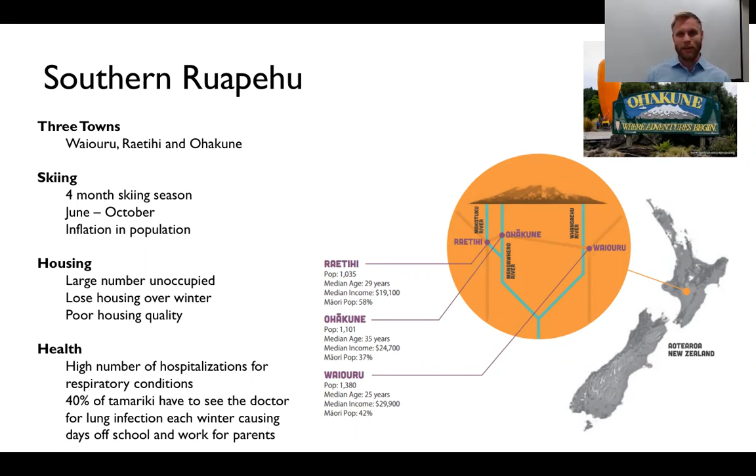So for those who don't know, it's known as a tourist town, particularly for skiing. 4 months of the year, the population explodes as people rush in and rent holiday homes to go skiing. And of course, this leads to a number of problems. And while we're on this slide, just have a look. Median income in Raetihi, Ohakune, Waiouru. So Ohakune, 24,000 a year. Raetihi, 19,000 a year median income. So things aren't going terribly well.

And of course, there's some wicked problems. The 30 to 40% underemployment. People get employment where they can, obviously seasonally. When the ski season kicks up, they'll rush in and get as much work as they can. And also harvesting the carrots, they'll do work there. But a lot of the time, there's nothing. So there's a lot of people really eager for meaningful work.

Because it's a tourist economy, there's homes everywhere, but most of them are actually unoccupied most of the year. They're holiday homes. People rush in to rent them during the ski season. Off season, they sit unoccupied. And actually, a lot of the locals, in their contract, they'll lose accommodation over that period because the landlords can make more money renting at some ridiculous rate, $100, $200 a day for tourists.

One of the big ones is the peak power demand that comes in. So when everybody flocks for the ski season, it causes a huge increase in peak power, and it's way over capacity for what this area can support. The lines company gets slapped with fines for this, and that actually gets passed on largely to the locals because they're the ones paying the costs that normalize throughout the year. So they have incredibly high power rates. It's really surprising to see, actually. You see some of their statements and you think, how are they paying more than me for less?

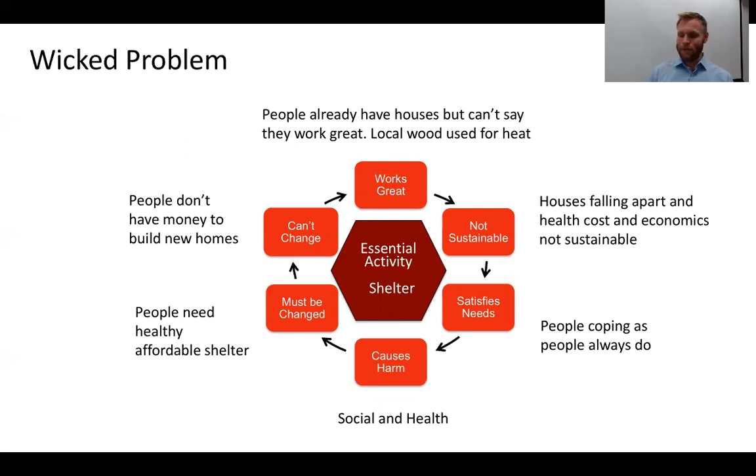Now, why are these wicked problems? Because what's happening at the moment does work. Barely, but it works. And so because it works, it's just kind of ticking along, but nothing's getting better. So it's a big pitch, which I'm going to lay out for you over the next few slides. We went there and we saw a potential for a transition engineering shift project. That is sustainable log homes for the region, using local resources, local labor, feeding into the local economy as much as possible.

And not just any log home, but we want it to work as much as possible with the local people to see what would a Ruapehu, what would a New Zealand log home look like? And I think we found it. So why log homes? Most of you may not be familiar with them, but they're incredibly healthy. They've got good insulation values, and those thick walls have a lot of thermal mass.

If you ever get the chance to go into one of these homes, when you walk in, there's a feeling. What I know as an engineer is the radiative heat transfer. It has a certain feeling, just like if you walk into a cave. It's that huge thermal mass in the walls, but you're walking into a warm cave and you feel secure in them because they're these strong, hefty, thick-walled buildings. It's quite a feeling.

They are affordable, despite maybe popular opinion. Most of the time when you see log homes, you will see log mansions, people specifically seeking out to make this very impressive house. But just the general costs are actually quite low. They're very labor intensive. So when you are spending money on a log home, you're spending money on the craftsmanship, the thinking, the smart use of resources that go into it. You're not spending it on stuff.

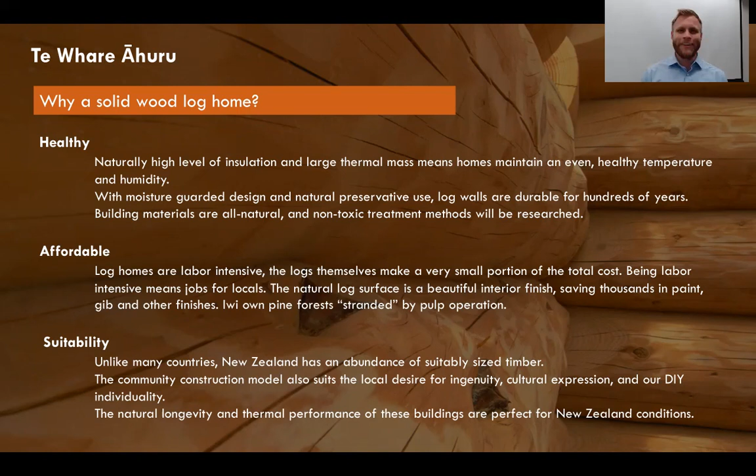Log homes use less fasteners. They won't use cladding, the cladding of the logs, the internal gib. Instead, you have logs. So they use a whole lot less stuff. And the stuff that is used is all from the local economy. It's all from the local area. And unlike many countries, New Zealand, we have a wealth of timber. We have it everywhere. So we're well suited.

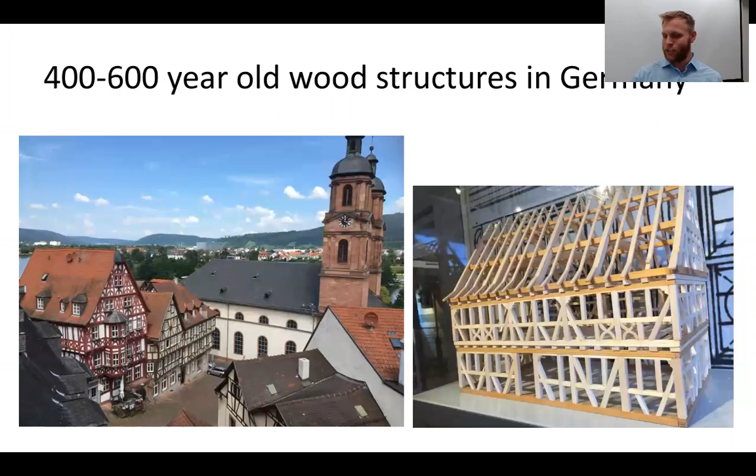So as I said before, we wanted to find what would be a unique, identifiable log home for this area. So we came up with Te Whare Ahuru design, and that was with working with the Ngati Rangi, talking, understanding what they want in a house, not what's been given to them, but what would they seek out. And we found out there's some things that are really important. Some things were kind of surprising.

So a side entrance, and before you enter the house, a place to wash your hands, a place to do wet work. That was really important. And also a generous and deep porch. Right, so these stood out as really important things. And one of the characteristic pieces, which is kind of really beautiful about this project, is they identified a particular roof pitch. And it's the roof pitch that actually mirrors Mount Ruapehu.

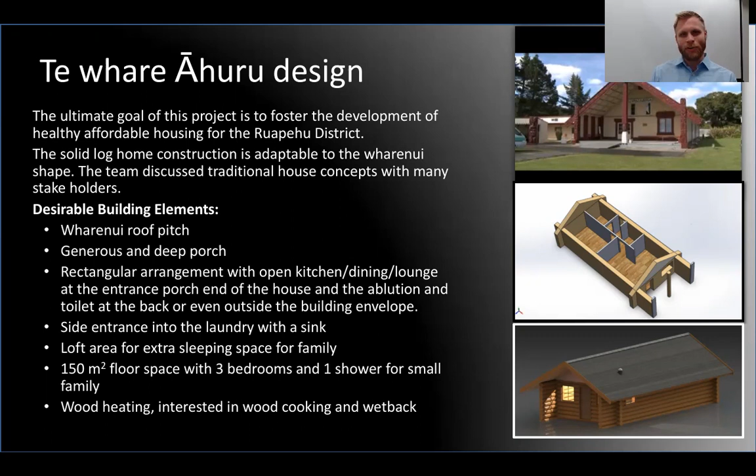And when you see images of this log home or plans of this log home, you think, no, that's nowhere else. That's just here. That's really uniquely New Zealand. So I think we succeeded in actually, it's a home that you could look at and you could think, that's us.

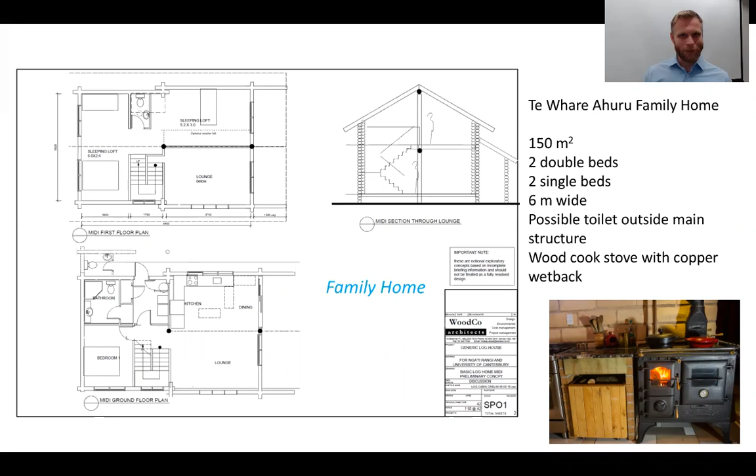So we had architectural plans done for these. We worked with people who know about log home building. There's not a lot of them. So Jess Patterson worked on these. We did plans for a large family home. So 4-bedroom, 150 square meters, 2-story. It's easy to go 2-story in a log home. But also a granny flat.

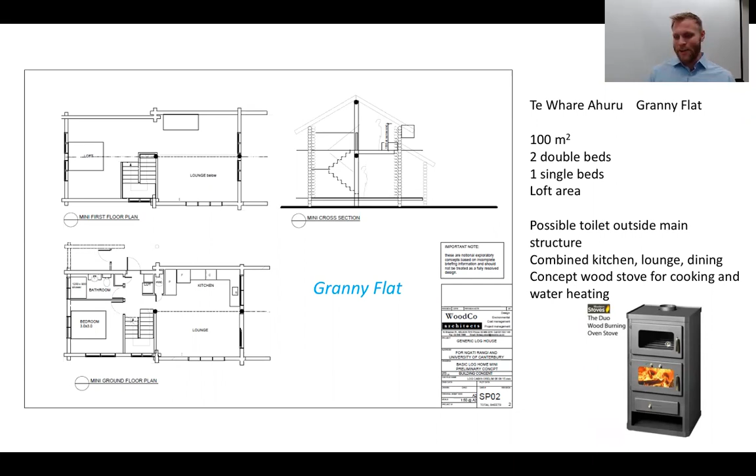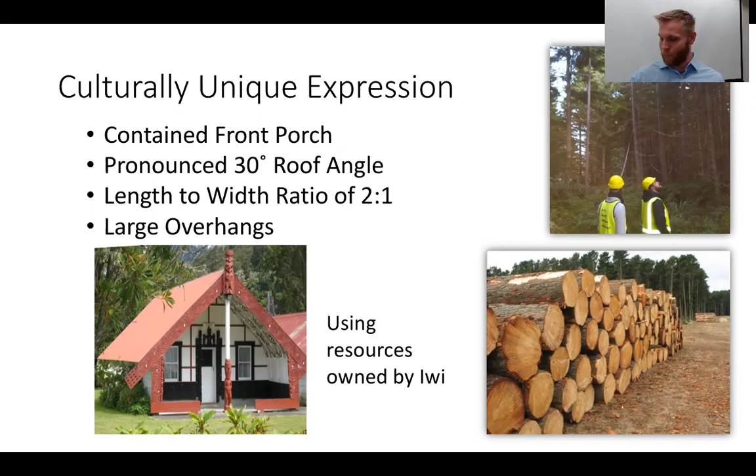And that was once again by consultation, understanding what people wanted these homes for. Flexible, adaptable. So big spaces that you could use in many ways that could accommodate a lot of people when you need it, and not many at other times. And of course, all of them are heated with a wood burner. So once again, there was that characteristic roof angle and really beautiful front porch. Large overhangs. The overhangs become important. We talk a bit more about them later.

And it was important for us to not just look at this as an abstract, there you go, here's a sustainable house, but something that made sense in the area for the people. So we did a bit of commercial research around this as an industry for the area. We know people who are very invested and interested in the land. They do a lot of work with it, who know what's around. There's forestry around Ruapehu as well. We visited the forestry there.

So a business that builds these houses for the local area, but also for the rest of New Zealand, where you can build the skill set and the craftsmanship required to build these handcrafted homes. And I had experience of building one of them. So there's a lot that goes into it. You've got to think, and you're not working with a linear Cartesian material. You're working with a tree, and every tree is different. And you can't use every tree too. I won't get into that. So a local business working with the local people and building local jobs.

And of course, being engineers, we had to do some engineering. We wanted this to be passive. And one of the ways is how you design those overhangs, how you design those windows. If you put windows in the right place, man, you can radically transform your building. So in winter, you want as much sun as possible. You want to warm the space up. And then in summer, you can use those overhangs to shield your building. So you don't actually need the cooling. If you do this sort of design right, you cut your bills and you cut the amount of heating and cooling you need radically.

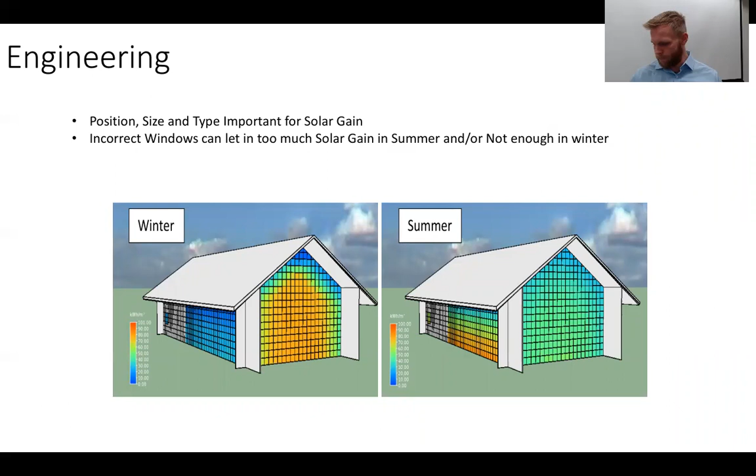Are they insulated enough? We did some modeling and some extra research on it. People might think of log homes as having infiltration, but no, properly made log homes, you couldn't slide a piece of paper between the joints. They seal up. They do that by scribing the profile of one log onto another, so they seal, and they settle to tighten the gaps between the logs.

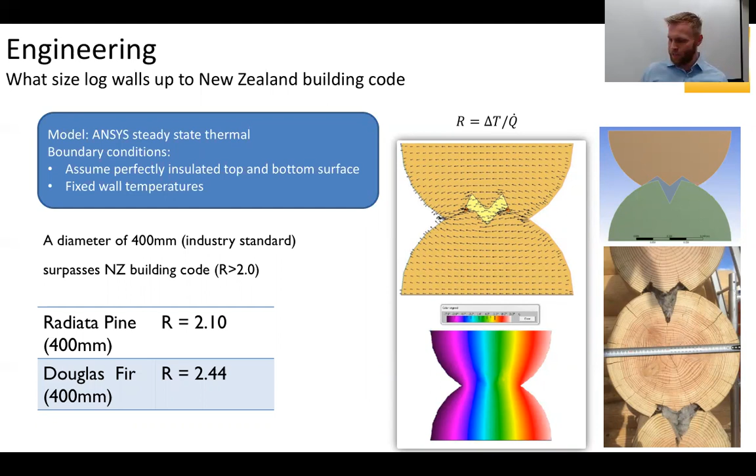So we did some work on that. We found that they're sufficiently insulating with even reasonably small logs for the New Zealand standard. And on top of that, the really cool, well, I think really cool part of these is thermal mass. Thermal mass, energy storage, thermal storage works to moderate the temperatures inside over time. The mass as well moderates the humidity. So you get these really consistent, really comfortable environments.

It also can work to defer your peaks. So when you're in a log home or a building with a lot of mass, the walls aren't seeing the outside temperature at that time of day. It's actually seeing it from a little bit earlier. So that heating you had during midday actually gets stretched out into the evening, and it defers that peak, which is really good for peak loading.

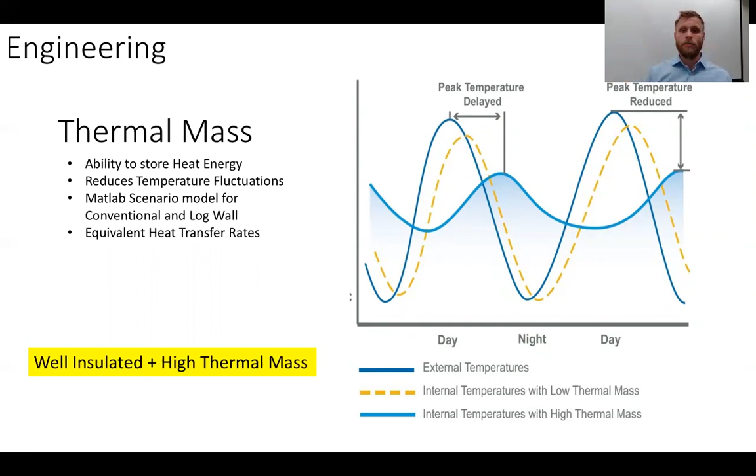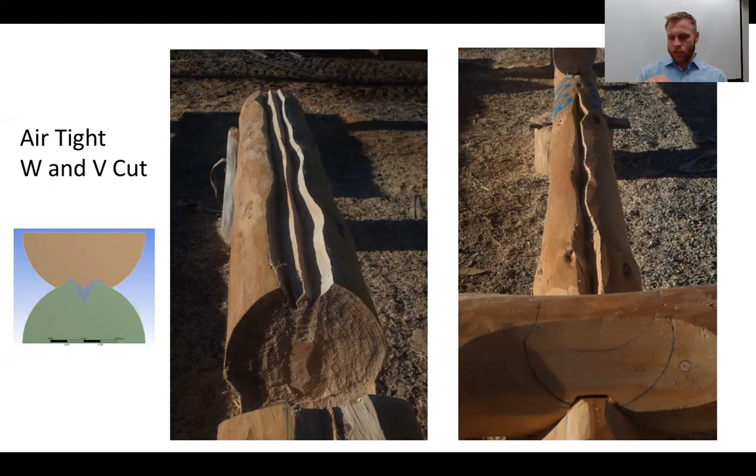So here's some images of a log shell we built, and you can see how custom it is. Every log is scribed to the other, so you don't have these straight lines. You have quite a profile. We use chainsaws to cut those out, and done well, these things sit together so tightly.

Moisture control. Leaky homes, eh? Everybody's terrified of leaky homes, and one of the answers we had to leaky homes was to treat timber, which, hey, you can do. But there's other ways to prevent something from rotting, and that's to make sure it doesn't get wet. And if it gets wet, allow it to dry and to drain. So that traditional knowledge in log craftsmanship has been brought forward.

That's why if you look at a log home, you will always see overhangs, eaves. You can design these homes so they don't actually get wet. There's other things you can do, traditional preservatives, natural oil and mineral compounds you can stain the houses with, and they work well. You can see that these buildings last for, well, hundreds of years.

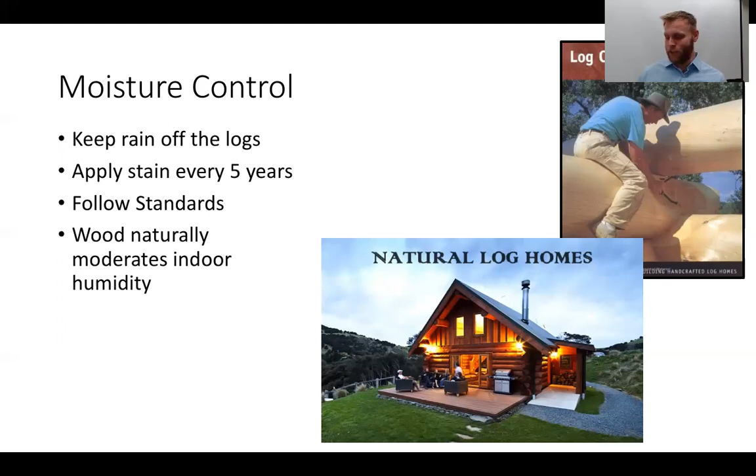So we worked out some costs, the cost to build for 100 square meters, not including the internal fit out, about 75,000. So about comparable with, or actually a little cheaper than, what you'd expect by conventional building methods.

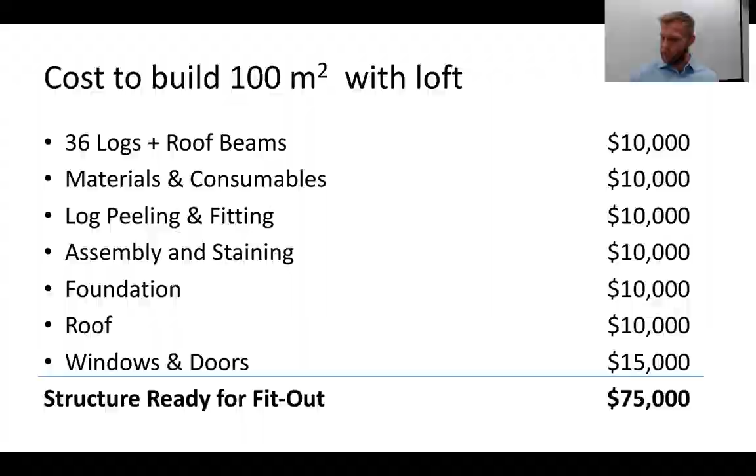So going forward, what we had was well received. I think everybody really liked people going and caring about a region. We've prepared the architecture, and we've done some testing on an actual structure. So really what's left is if somebody wants to step forward and steward the project forward, it's primed for it, so reach out and you'd be welcomed.

But going through this process, there are some research questions as well. One of them is, there are international standards for log home design. That doesn't mean your local council knows them. So translating that wisdom, that knowledge that's been developed and accepted in other places, to a package that councils feel comfortable certifying, there is some work to do there.

And man, there was this big potential opened up around radiata pine. We've got radiata pine coming out of our ears. We typically view it as a very low quality timber. Either you need to treat it a lot, or it goes into making pulp, making paper.

So very low value. But we could be sitting on a gold mine if there are design ways where you can use it in a building where it's appropriately designed, it has enough eaves, water's not getting on it, with these natural preservatives, and you kiln dry the logs to stop them experiencing the conditions at which they would have lower durability. If we can use radiata pine for these sort of projects, we are sitting on a gold mine. We've turned what we look at as a very low value resource into something incredibly valuable.